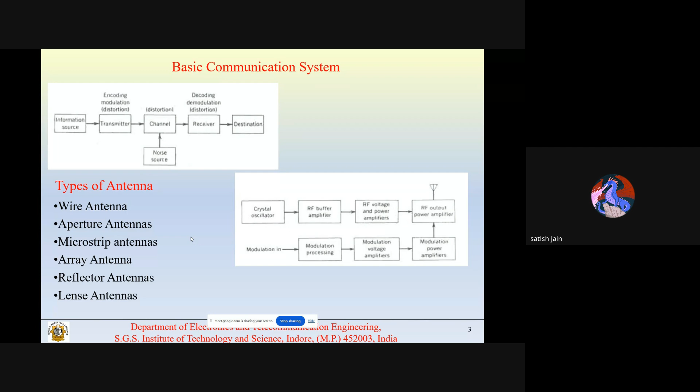So this is the role of the antenna basically. Antennas radiate the signal toward the receiver side. Now let us talk about the types of antennas. Types of antennas available are wire antennas, aperture antennas, microstrip patch antennas, array antennas, reflector antennas, and lens antennas.

it becomes the helix antenna. And remember, in the case of the dipole antenna, length and radius play an important role as far as performance is concerned. In the circular loop, the radius plays an important role. In helix antennas, the number of loops, the distance between the loops, the diameter of the loop, and the diameter of the helical tube are the parameters on which the performance of the helical antenna depends.

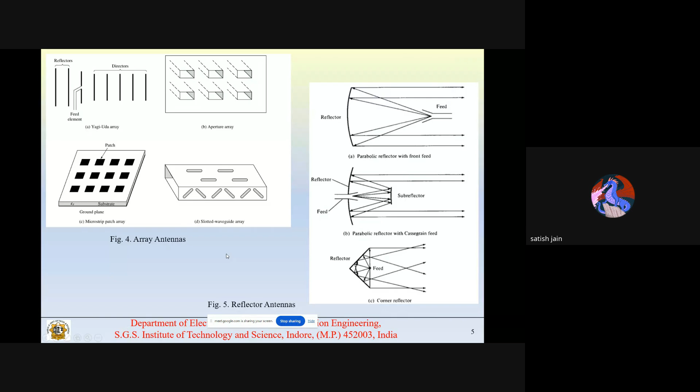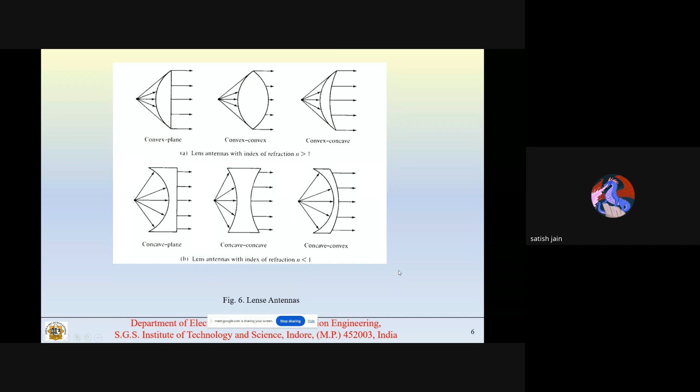Lens antenna. We have already studied lenses in physics in school. A lens works on light, and light is also an electromagnetic wave, so it can also be used to transmit the signal. There are convex-plane, convex-convex, convex-concave, concave-plane, concave-concave, and concave-convex lens antennas. These lenses have an index of refraction greater than 1, and these antennas, concave-plane, concave-concave, concave-convex, have a refractive index less than 1. Now, let us come to planar antenna technology.

Nowadays, researchers and designers are putting effort to design, develop and experimentally measure planar antennas. The microstrip patch antenna is one of the planar antennas. Just a few slides back, I showed different types of antennas, like reflector antennas and aperture antennas. One thing you might have observed is that they are three-dimensional antennas. They are not planar antennas.

They are three-dimensional antennas. They have certain weight, certain volume, and they are bulky also. So in certain applications, they may not be useful. For example, in a rocket you cannot put a reflector antenna, parabolic reflector, etc., because of a lot of problems, especially aerodynamics. So for that you require an antenna which can take the shape of the rocket surface, like a planar antenna.

If you take a planar antenna, you can easily paste it on the surface of the rocket, because when a rocket is launched, you need to track it, and for tracking you require an antenna. The antenna has to send the signal, right? So on the surface of the rocket you have to put the antenna on the metallic body. This is called conformal. So you have to use flexible planar antennas, and flexibility you can create by using a substrate with flexibility like foam, etc.

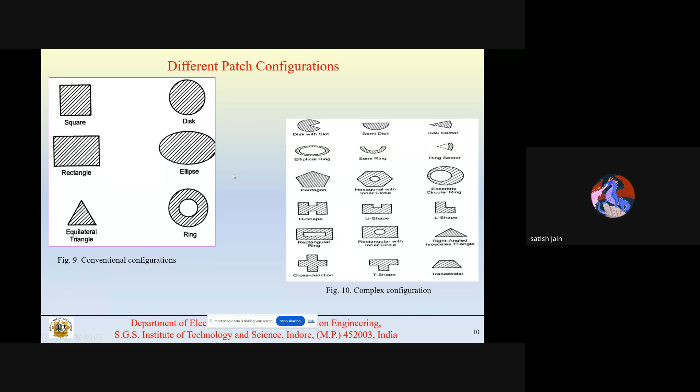is quite a difficult task, right? So that is very hectic, tedious and cumbersome. So complex configuration is to be discarded. So in general, most of the time, researchers and designers prefer the regular shapes because of the less number of variables involved.

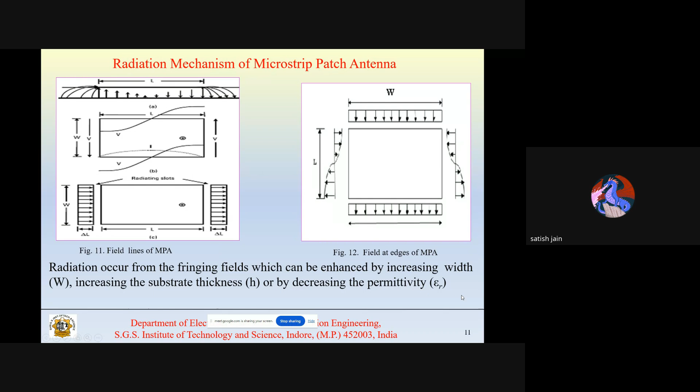Feeding techniques. There are a few feeding techniques available to excite the microstrip patch antenna. One is the coaxial feed. In coaxial feed, we have to drill from the downside in such a way that the drill reaches the patch. And when you connect the coaxial connector, the inside conductor is to be inserted in such a way that it reaches the patch, where it can be soldered. And the outer body of the connector can be connected to the ground plane, right?

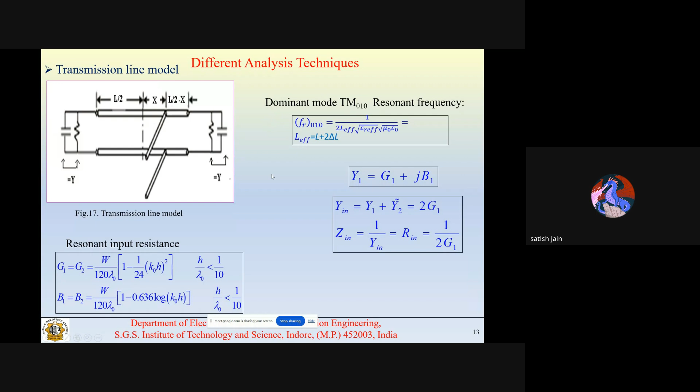The resonant frequency in this transmission line model is given by 1 upon 2 L effective times the square root of epsilon R effective, mu 0, epsilon 0. L effective is the effective length of the antenna, because there is a fringe field, so the length appears a little bit larger than the physical one. L is the physical length and the extension is delta L, so L effective is L plus 2 delta L. In this way you can find the resonant frequency using the transmission line model.

Now, in the cavity model, we consider the antenna as a cavity, because a cavity is nothing but some sort of confined area that's completely closed. A waveguide is open at both ends, but when we close it at both ends, if we short it, then it is completely closed, something like a box. Then it becomes a cavity. The same way we can think of our antenna; we can consider it a cavity.

It is available in the book. I've taken it from the Balanis book. It is a very, very standard book, easily available nowadays.

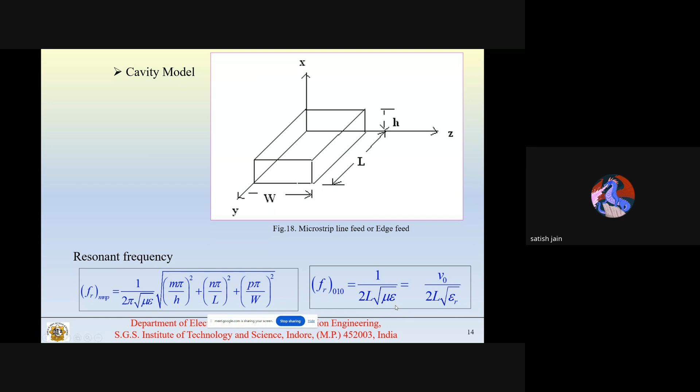So these are the resonant frequencies. If you simplify further for this particular mode 0,1,0, xy means y direction - field direction is the y direction in that case, and radiation is in the x direction. So for FR 0,1,0, the resonant frequency is 1 upon 2L mu epsilon under root, that is V0 upon 2L under root epsilon r.

Some important characteristics of the antennas are available, which I used to prefer in my design. Actually, when I design antennas, I ask my students to please focus on these points, because these points are very, very important. Of course, there are some more performance parameters available in the book, but from the experimental point of view, these are the parameters we go with, and their verification can easily be done experimentally.

So directivity is there, gain is there - I'm not going into definitions actually. These definitions are available in the book, and I think this whole microwave community understands them. So this is the directivity, this is the gain, resonant frequency and bandwidth, then dual frequency and multi-frequency behavior, then polarization diversity characteristics like linear polarization, circular polarization, elliptical polarization, right hand circular polarization, left hand circular polarization, then miniaturization, main lobe direction, axial ratio, half power beamwidth, efficiency, E and H plane radiation pattern in 2D and 3D, specific absorption rate, side lobe level, and front to back ratio. So these are the important parameters.

As far as bandwidth is concerned, for a linearly polarized antenna, percentage bandwidth can be calculated using the parameters H, W, L, lambda 0, where A is a constant having a certain value. Similarly, for a circularly polarized antenna, the bandwidth can be defined by AR minus 1, QT, A under root AR, where AR is the axial ratio and QT is the quality factor, which needs to be derived mathematically.

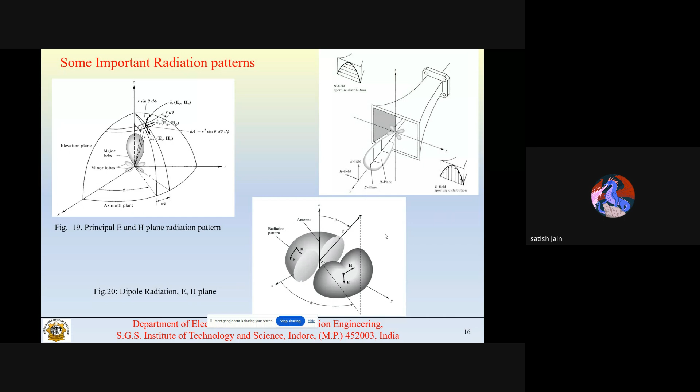So there is the H plane - if you see from the top you get a circle. If you see from the side, you get the definite figure-8 shape, which is the E plane. This is for the dipole antenna. To understand E plane and H plane, you must first understand the mechanism of the antenna - the approach is not the same for all antennas, it differs from antenna to antenna.

Now let us talk about bandwidth. The bandwidth of an antenna can be increased in many ways. You can keep a number of elements in the same plane so they couple with each other and increase the bandwidth. Another way, if you don't have space in the horizontal direction, is to stack a number of antennas one above the other - this is called a stacked patch antenna pattern, which also increases bandwidth.

This is the reflection coefficient plot, f2 minus f1. This is the absolute bandwidth, but f2 minus f1 divided by fr, the resonant frequency, multiplied by 200 percent, gives the bandwidth in percentage. So there are two bandwidths used in antenna design: bandwidth in percentage and absolute bandwidth.

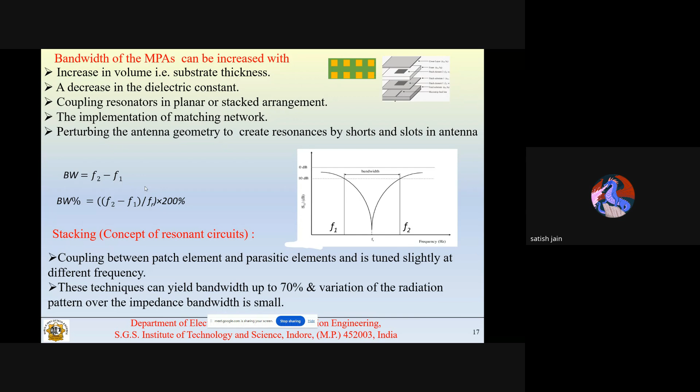Now let us come to the main topic, the main theme of this Atal FDP, that is the millimeter wave antennas.

We started from 6, so it's 45 minutes. Is my voice reaching everybody? Yes sir, yes sir, I am audible. If you want to correct me somewhere you can suggest it so I can rectify it. Yes sir, sure, I am running well. Yes sir, all well, okay. My point is clear to all of you I think. Yes sir. My flow could be a little different, but I expect all of you to grasp it - it is very, very important information.

So now I'm coming to the millimeter wave antennas. Nearly 36 slides are there in this presentation, so I think half time is over. A little bit more than half time, I will take 45 minutes, then I will complete it and pack up. Yes sir, no problem.

Okay, so millimeter wave antennas - I have shown a lot of slides so far. They are useful to understand the antenna and design concepts also. Once you understand them, it becomes easy to understand millimeter wave antenna design.

So let us not think in this manner - what is the use of E plane or H plane or bandwidth and this and that - because all fundamentals are useful. The beauty of antennas is every fundamental is useful, because you have to design the antenna, estimate the bandwidth, estimate the resonant frequency, see the polarization - whether it is linear or circular, and if circular, left hand or right hand circular polarization. You have to estimate the E plane or H plane radiation pattern, understand the gain, understand the directivity.

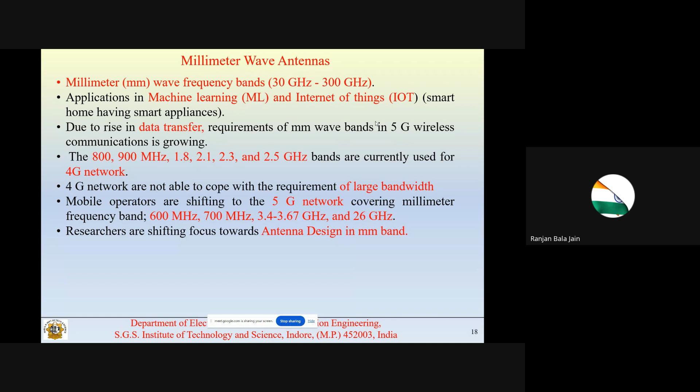Now there are applications. Sir, you are not audible. Hello sir. Hello sir, I think sir is disconnected. Okay, no problem, let me talk, let me call him. Yes sir is joining in some time. Yes madam. I'm sorry, 2-3 minutes, some issue happened. Yes sir. It's okay sir, no problem.

Now is the screen visible to ma'am? To all of you? Yes sir, yes sir, it is a millimeter wave antenna design. Yes, right sir, yes. So millimeter wave frequency band is 30 gigahertz to 300 gigahertz.

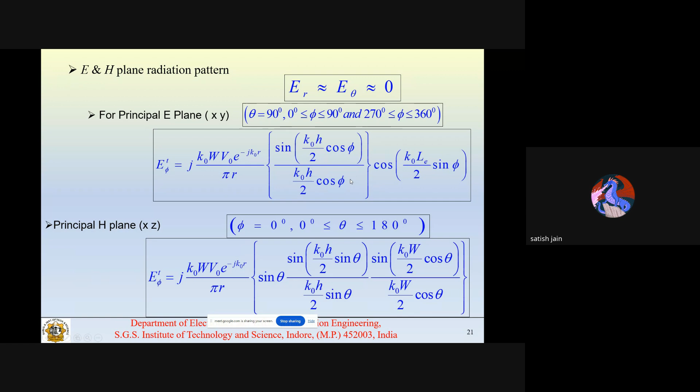Okay, the H radiation pattern cannot be parallel to the patch. You have to understand it, because this is not conceptually correct, right? Both planes are perpendicular to the plane of the patch, so that is the E plane and H plane, right? So these are the equations which can be utilized to calculate the E plane radiation pattern and H plane radiation pattern in the case of this rectangular microstrip patch antenna.

You can find out epsilon r effective. You have been given epsilon r because you are having a dielectric constant material, which has a certain height. You cannot change the height. Okay, so you have to lock it. You have to fix it. It is not a variable. Epsilon r is constant. So you have an epsilon r, you have a height h.

Now you require the width of the antenna. You don't know what could be the length and what could be the width. So you have to find out both. So first, you have the epsilon r value. And you are told, suppose, you have to design the antenna for 40 gigahertz.

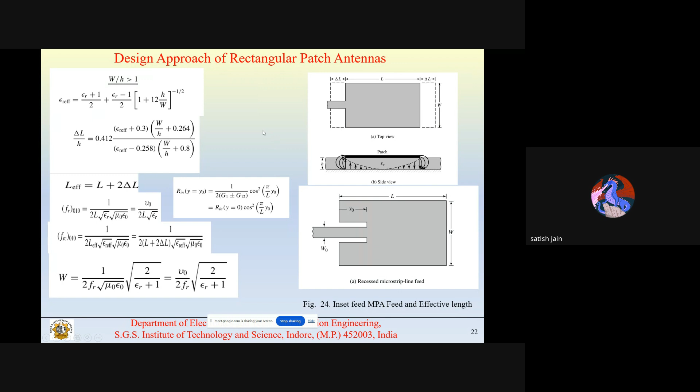As happens with the dipole, there is a certain relationship. v equals f lambda, right? So lambda is v upon f. Lambda is inversely proportional to f, right? And L is lambda by 2; the length of the dipole is lambda by 2. If you have a frequency, you can convert it into lambda and make it half, divide by 2, lambda by 2. That gives the length of the dipole.

Similarly here, if you want to find the radius, you can find it from the frequency. So design is easy because only one variable is involved here. In the rectangular patch antenna there are two variables, length and width. Of course, the feed location also has to be optimized in this case, right? Moreover, there is a fringe field at the edges, so through the periphery there will be a fringe field, right?

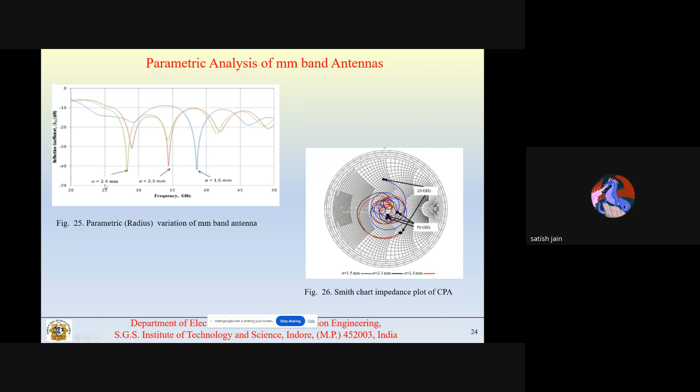Now the 5G antenna. What we have done is we have reached till 28 gigahertz, so a little bit shifted here. So what is to be done? Increase the radius of the patch a little from 2.4 mm onwards. So we are getting here. Now our radius of the patch is 2.71 mm, and this antenna is radiating at 26 gigahertz. That is one of the bands to be utilized in 5G applications. So this is the 26 gigahertz point.

And here the S11 value you are getting is minus 43.48 dB. This is a very appreciable amount. It shows that the reflection is very minimal. This is a very good design actually. This type of value is very rare as far as antenna design is concerned, right? And here the impedance behavior we have plotted from 20 to 50 gigahertz.

This pattern, the part which is minus 10 dB below, is within the VSWR 2 circle. So here this is the 20 gigahertz point, this is the 50 gigahertz point, and this is the 26 gigahertz point, exactly on the line and within the VSWR 2 circle, right? And the optimized parameters are listed here. The height of the dielectric is 1.6 mm, dielectric constant 4.4. These are constants, not variables.

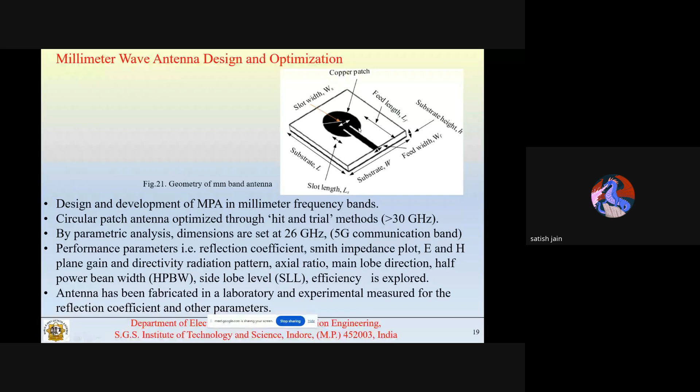Then length of the feed 2.81 mm. This is a variable, because our structure is this, right? So we have to optimize the radius, then the feed parameters, length and width, and the slot length and width. So 5 parameters we have to optimize. Length of the feed 2.81 mm, width of the feed 0.934 mm, slot length 0.52 mm, slot width 1.13 mm, then radius of the patch 2.71 mm. These 5 parameters are variable here, not only the radius.

Because we are not feeding it coaxially, we are feeding through the inset feed, right? And the height of the copper patch is constant, 0.07 mm. The dimension of the substrate we have not made variable; we fixed it at 12.5 mm by 15 mm. And the feed point location, this also we have optimized, 2.19 mm. So these are 6 parameters.

Okay, so these are the results of 5G antennas. You can see we are getting such nice results in simulation, of course. So far I am showing you the simulation activity. Once the simulation is over, we can go for experiments for validation purposes, right?

I will give you sufficient time for discussion, ma'am. Yes, sir. Possibly I may finish a little bit early, so you will get 10-15 minutes to discuss. That is the most important aspect. Yes, sir, E-plane and H-plane.

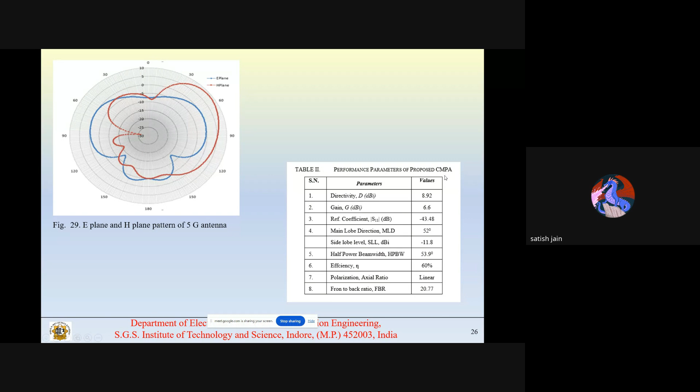And front to back ratio is 20.77, right? So E-plane and H-plane patterns for the 5G antenna, and these are the performance parameters of the proposed circular microstrip patch antenna. Clear? Now our fabrication starts from this point actually.

These are the machines where we have fabricated the antenna. This is a dielectric curing machine, microwave oven. Okay, because what happens, you have a dielectric sheet, then you have to clean it with water and other chemicals, and after cleaning you want to dry it, so you require the microwave oven, right?

Then you require a negative film maker, because the antenna pattern you have to develop on the dielectric sheets, so initially it has to be taken on the transparency, and from positive to negative you require a machine. So this is a negative film maker, right? Dry film developer. After the antenna has been printed on the dielectric sheet, you have to develop it. So you require the developer, right?

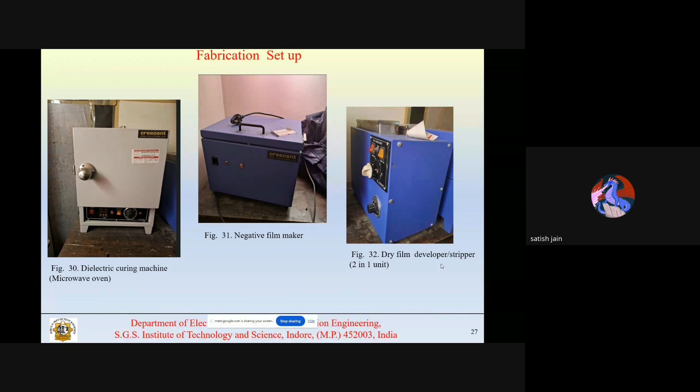Two-in-one unit developer stripper. Then this is the double-sided ultraviolet exposure unit with vacuum. Before developing, you need to expose it through ultraviolet, right? So there is a certain procedure actually, right? So this is the machine which you require.

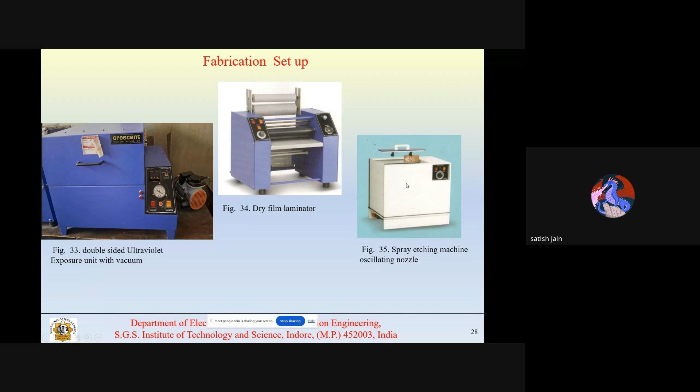Then dry film laminator, this is the lamination machine, because these are the films, and the dielectric sheet we have to insert in this machine, so the film comes on the dielectric sheet, and then you have to go for developing the film, right? Then after that you have to etch out material. After having the print of the antenna on the dielectric sheet, it requires etching out, right? So this is a spray etching machine, which we have.

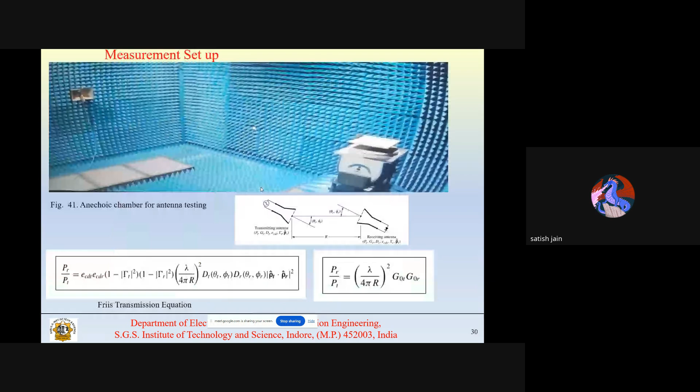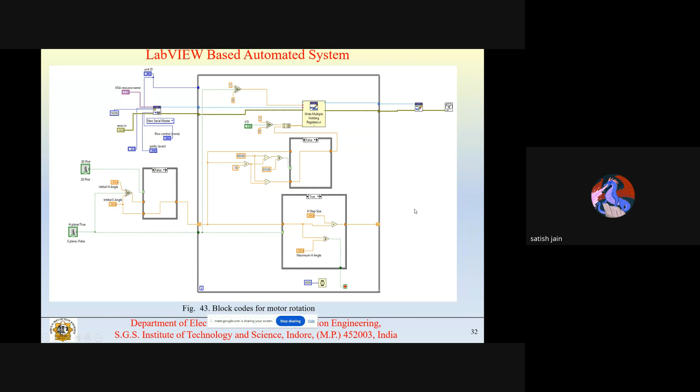So we developed this software at our own end, and after development, this company offered us jobs. The company has offered our students jobs. They are saying, send two students who know LabVIEW, right?

Chandramohan sir, can you please mute your mic? Hello, Chandramohan sir.

Yes, sir, you can continue. Okay, so

So here, in-house activity, I would like to tell all of you what we are going to do. We are running one chapter, that is ATMS, Antenna Test and Measurement Society chapter. We are Central India's chapter, running it in-house. Every month, on one Saturday, we conduct a lecture. Nearly 35 lectures are over, nearly 3 years are going to be over.

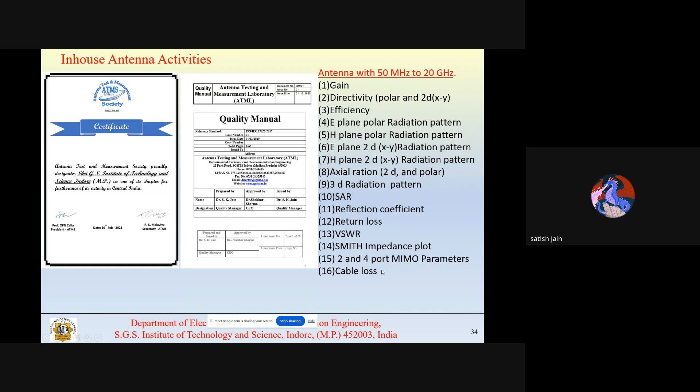These are the current activities. SAR measurement we have done just 2 days back. A particular person who had a project from MESE told us, sir, we want to measure the SAR. So we provided this facility. He wanted to measure the permittivity of the material, so we provided this setup, a coaxial waveguide setup. Through the VNA, we found the S11, S21, S22, S12, and by putting some equations and algorithms and developing some MATLAB codes, we found the dielectric constant of the phantom, which is nearly 50. Because he is using the phantom for SAR measurement, a very small antenna he kept below the phantom.

You can see here the VNA's other port cable is connected, which goes to the antenna downside, and on the antenna water has been kept, and on the water he has kept the phantom equivalent, that is the gelatin material, cubic structure you can say, equivalent to that. From the top we found different values of the electric field at different locations, and found the SAR value of this particular antenna.

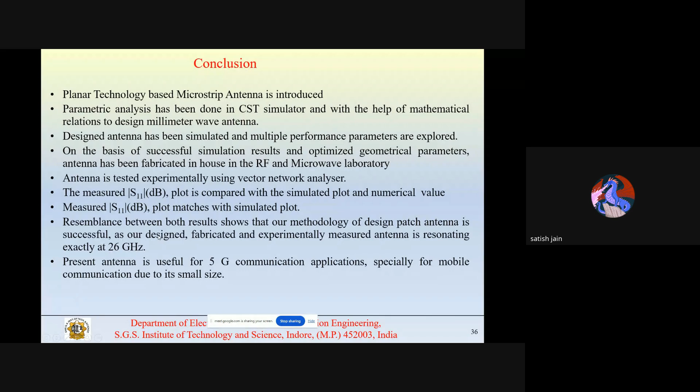So now conclusions. Planar technology we discussed, the parametric analysis we have done in CST, then the antenna has been designed and simulated. Then we have tested the antenna experimentally using a vector network analyzer. Many parameters we went through, like side lobe level, main lobe directions, efficiency, etc. Then we have proved and developed the antenna for 26 gigahertz, that is for 5G applications.

Okay, so these are the references.

And acknowledgement - I would like to acknowledge. I would like to thank the Ministry of Human Resources and Development. I would like to thank AICTE New Delhi, and I would also like to thank SGSITS Indore for providing TEQIP funded research facility to accomplish this proposed work. So thank you all, thank you so much.

Thank you, sir, for this insightful and excellent session with the realistic simulated values. Sir, there are a few questions from participants. Yes, definitely.

Suggest optimum feeding network method for broadband circularly polarized antenna arrays. Okay, so what is the problem in that? Optimum feeding network means what? Are you asking about Matlab, or a network analyzer? Arun sir is asking this question. Please clarify this question a little bit.

Actually sir, I want to design an antenna array which is broadband, starting from 10 gigahertz to 40 gigahertz. Specifically I want to use circularly polarized antenna, left hand and right hand circularly polarized antenna. So I want to know whether I can go for corporate feed or substrate integrated waveguide method, in order to avoid the losses and the phase errors.

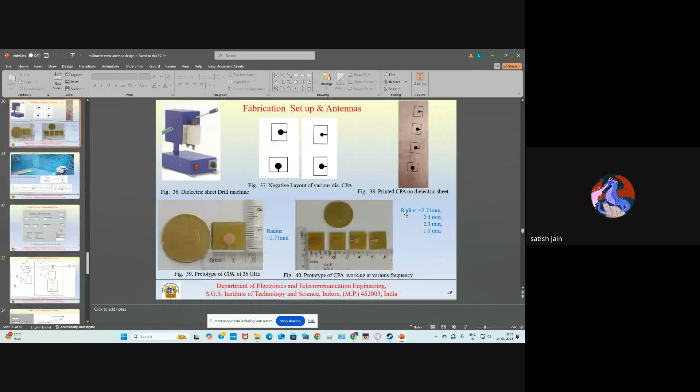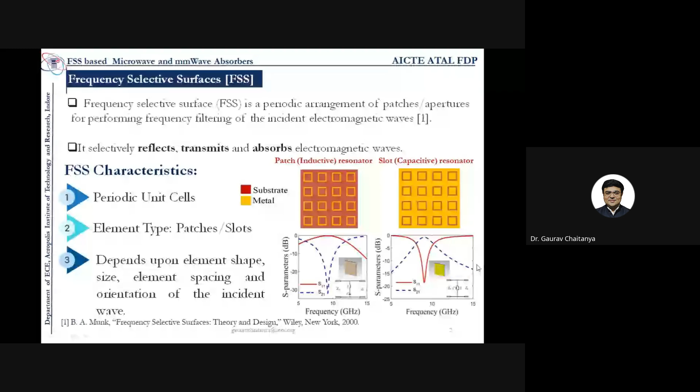If we see the applications of FSS, there are a wide variety of applications at present. They are well accepted in radomes, absorbers, antennas, polarizers, spatial filters, EMI shielding, dichroic subreflectors, and high impedance surfaces.

Out of these, if we talk about absorbers, in today's interconnected world where industries rely heavily on seamless communication, the management of electromagnetic waves is paramount. Across sectors such as telecommunications, aerospace, radar systems, and anechoic chambers, the demand for efficient electromagnetic wave control mechanisms has intensified.

At the heart of this demand lies the crucial role of microwave absorbers. Microwave absorbers find extensive industrial and practical application. In telecommunication, they are crucial for reducing interference and enhancing signal clarity in antenna systems and satellite communication.

In aerospace and defense, microwave absorbers play a pivotal role in stealth technology, aiding in reducing radar cross section of military assets and calibrating radar systems for accurate measurements.

In medical imaging, microwave absorbers improve image quality and reduce electromagnetic interference in techniques like MRI, magnetic resonance imaging. Additionally, they facilitate material testing processes, ensuring accurate measurement and analysis.

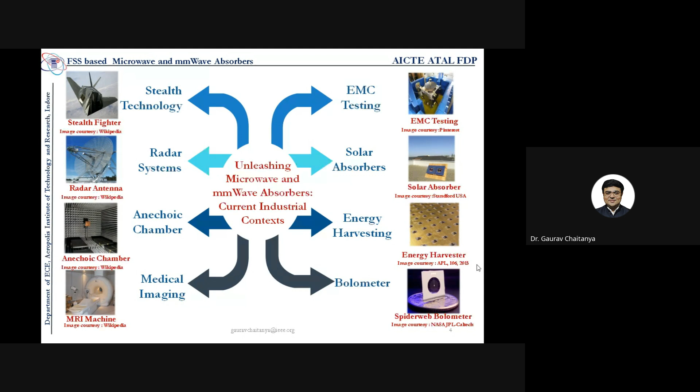Even in the automotive industry, for energy harvesting, microwave absorbers are employed to reduce interference and improve signal integrity in vehicle designs, contributing to the development of advanced driver assisted systems or autonomous vehicles.

If we see the physics behind how microwave or millimeter wave absorption takes place, generally a microwave or millimeter wave absorber exhibits absorption at microwave or millimeter wave frequencies, and can be designed as a single or multi-band absorber. How does this take place?

If some electromagnetic energy, EI, is impinging on the absorber surface, either it will transmit or reflect back. To get it to act as an absorber, we need to minimize the transmitted power as well as the reflected power simultaneously, which comes from this equation: absorptivity equals 1 minus S11 squared minus S21 squared. Now how can this be done?

One solution is applying a ground plane on the other side of the absorber. This complete metal lamination ensures zero transmission, so there will be no transmission, only reflection. The equation now reduces to A equals 1 minus S11 squared, as S21 is now equivalent to 0.

How do we get the reflection, or minimize the reflection, to be 0? Here we use the impedance matching criteria. We can design it such that the input impedance is matched exactly with the free space impedance using this particular formula. So microwave or millimeter wave absorbers finally use frequency selective surfaces as one of the major tools.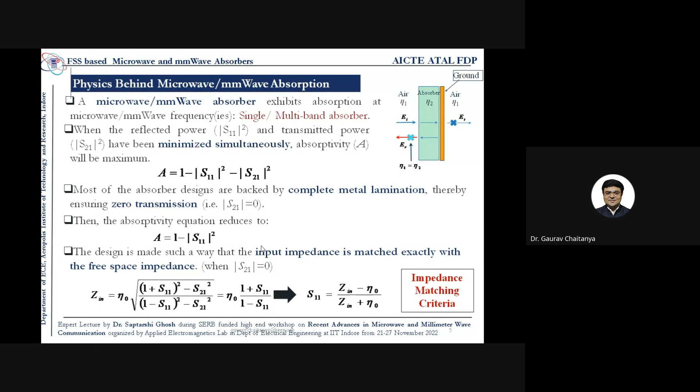If you go for the traditional absorber, there are certain challenges associated. If you talk about Salisbury screen, Jaumann layer, Dallenbach layer, or pyramidal absorber, or materialistic absorbers like ferrite, where people are using graphene or carbon nanotubes.

They do have certain challenges associated, like most of them are very expensive, bulky, cannot be transported, fragile, and very thick. So when real time applications come into picture, such things are certainly not much in demand. They are traditional, but there are better solutions nowadays in the market.

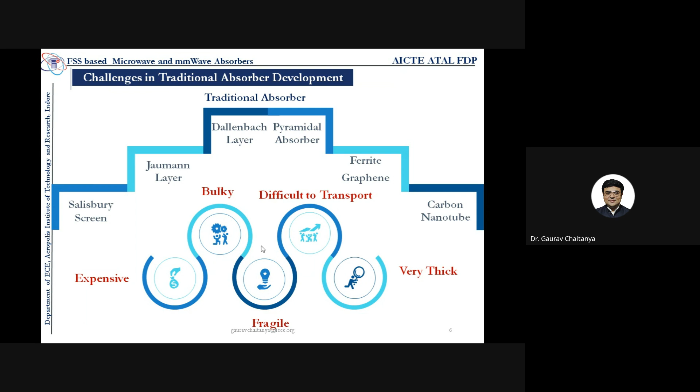The advancement over these traditional absorbers is the FSS based absorber designs, which come with benefits of reduced bulkiness. They have enhanced and strong absorption as compared to the previous traditional absorbers.

They have an ultra thin geometry of the order of almost lambda by 20 as the unit cell size. The design is scalable, where you can scale the design from a very low frequency to a very high frequency, so from microwave up to millimeter wave, and even to the visible range.

They have high angular stability and come with a cheaper cost. The popular fabrication method for such absorbers is the photolithography based PCB manufacturing process.

Let me make you understand the measurement technique, because recently Dr. S.K. Jain was there, and he introduced you to several good measurement techniques for measuring antennas. Here I am giving you the measurement techniques, how to analyze or finally find out the parameters for the absorbers. So this is the setup we are using for the absorber design measurement, where two antennas

are placed in near proximity of each other, and then the background noise has been recorded. Now we keep a metal plate in front of the antennas, and the transmitted power has been measured, which is S21 square. The metal plate can then be replaced by the fabricated sample with identical dimensions. We generally make a dimension of almost 250 cross 250 mm or 300 cross 300 mm,

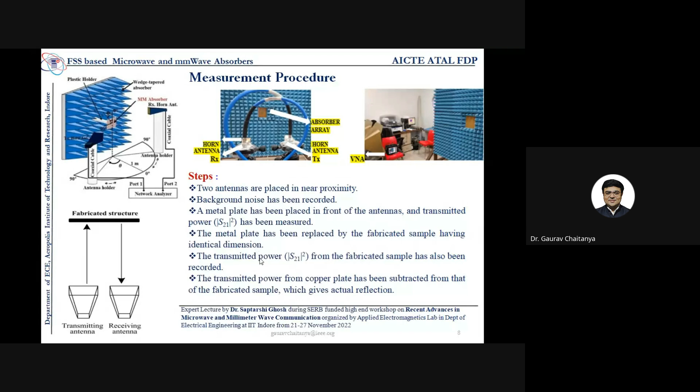Now if we go for the oblique incidence measurement, we have two types of measurement technique, where measurement is done on different polarization angles at normal incidence, and then for different oblique incidence angles. So if we send the wave normally, with a zero angle, keeping the transmitter and receiving antenna in close proximity, we can rotate the fabricated structure over several angles with some step sizes from 0 to 45 up to 90 degrees, and then see whether it is a 4-fold symmetry or a 6-fold symmetry structure.

Generally the structure gives you a polarization free or polarization insensitive response, and that is the requirement, because in real time applications we generally don't get all the incident waves impinging only from the normal. It generally comes with an angle. So such an arrangement and such calculations are necessary to calculate the response of the absorbers. Another particular thing is the oblique incidence under TE and TM measurement.

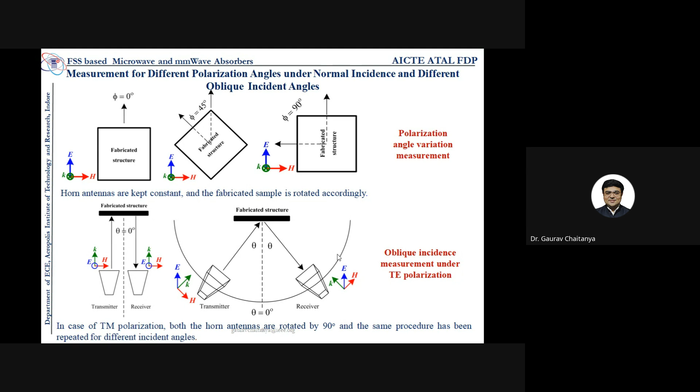What we can do is keep the sample at a fixed place, and then increase the angle between the transmitter and the receiver from 0 degree to 90 degree, and then see up to what degree under TE polarization or TM polarization we are getting a good response. We call that response the polarization insensitive behavior or the polarization stable behavior of the fabricated absorber.

The incident magnetic field aligns perpendicular to the plane of the split ring resonators, inducing magnetic excitation and resonance in the ring. However, this proposed absorber has a resonance at almost 2.0 gigahertz and a non-planar structure. Such arrangements are difficult to transport or to arrange in the same fashion at all angles.

Then comes a structure given by Landy. He gave the first metamaterial based absorber, realized with a structure size of almost lambda by 20 as compared to conventional absorbers. Of course, these absorbers are scalable from microwave to terahertz, terahertz to infrared, infrared to optical. And they can be easily fabricated, as I already told you, with PCB technology.

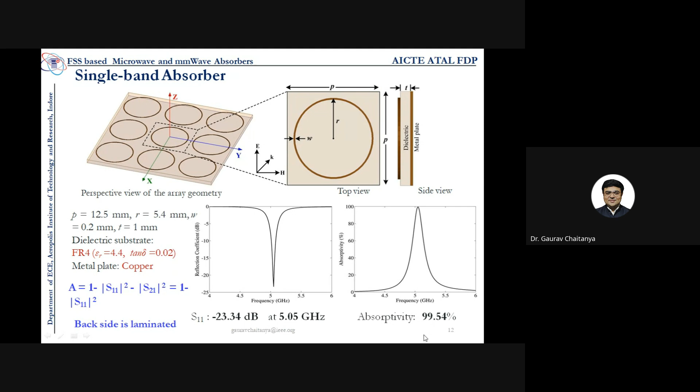Now the absorption takes place because of two things: the ohmic losses and the dielectric losses. The ohmic losses are generally because of the top copper ring. With lossy dielectric losses because of the dielectric material in between, it gives a very good reflection coefficient of almost minus 20 dB and a good absorption at almost 5.05 gigahertz.

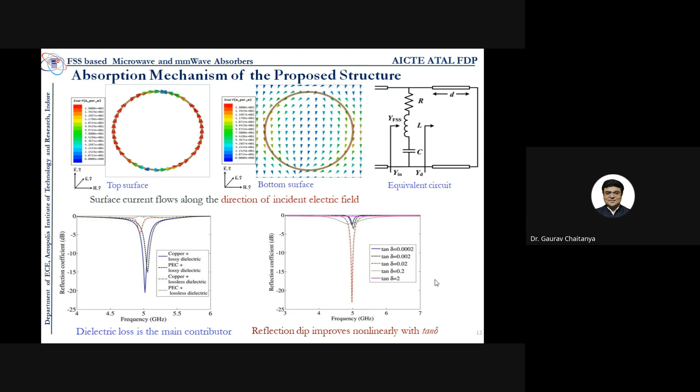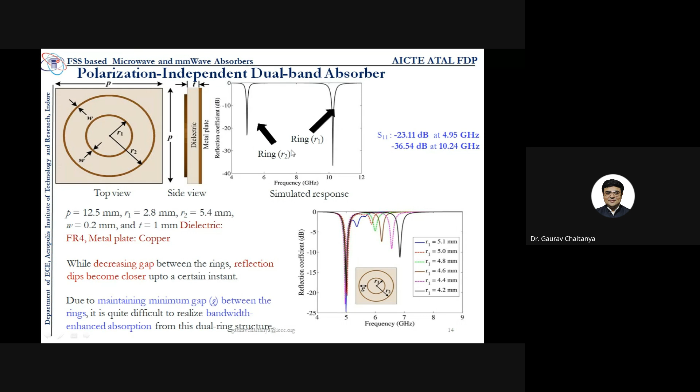Now from one ring, if we introduce two rings, what will happen? We'll get two resonances, obviously. We are getting a resonance of -23.11 dB at 4.95 gigahertz and -36.54 dB at 10.24 gigahertz. We are getting two resonances because of ring 1 and ring 2. The similar type of arrangement is going to be here.

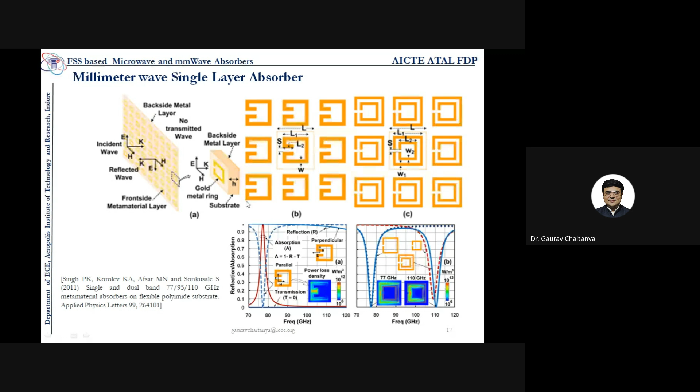At millimeter wave, we see a similar type of arrangement. Because of this split ring resonator structure, we get one resonance at 77 gigahertz, and because of this inner structure, we get another at 110 gigahertz as the resonant frequency. Such an arrangement has been done by PK Singh, where they use polyimide as the substrate and gold as the metal ring. So this has been shown here.

Then if we bring the resonances close enough, we can enhance the bandwidth. Because of this outer split ring resonator, we get one response, and with a meandering line arrangement inside, we get another response. Now we try to bring these responses close enough to each other that they contribute together in an enhanced response with a significant full width half maximum bandwidth.

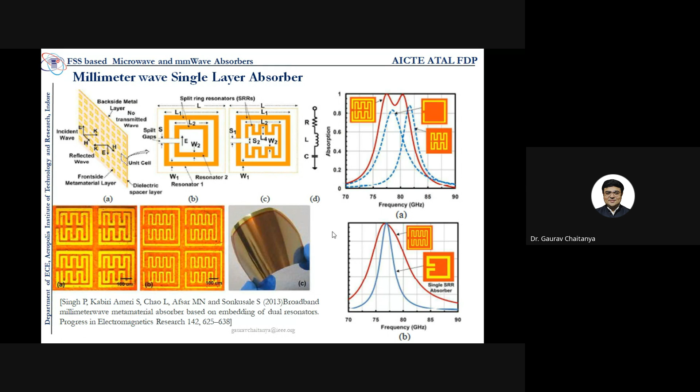And then we can see this is the fabricated part by PK Singh, and this wonderful flexible part can be very well bent with different radii of curvature. However, the complete assembly is very costly because we are using gold as the metallic part and polyimide as the substrate. But such arrangements are very well versed and regularly used in industry. Another way to get enhancement in the bandwidth is again bringing the resonators close enough.

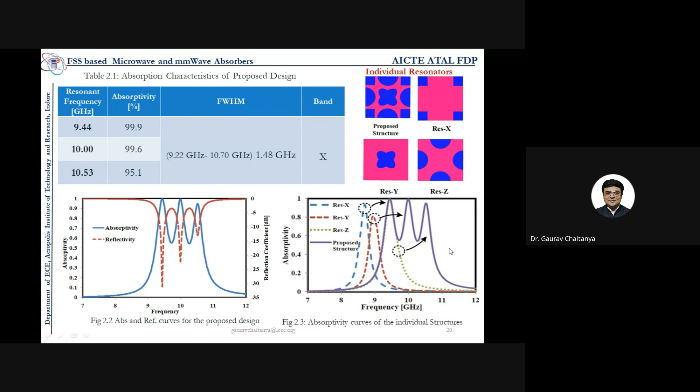There is another approach for the bandwidth enhanced FSS based absorber: a multi-layer approach. It features the model's accuracy, with numerical simulations aligning closely with analytical calculation for layer counts up to 40 in total, using a stacked metal and dielectric arrangement. Leveraging this model, the proposed method broadens the absorption bandwidth, either by increasing the layer count or by arranging the unit cells in close proximity.

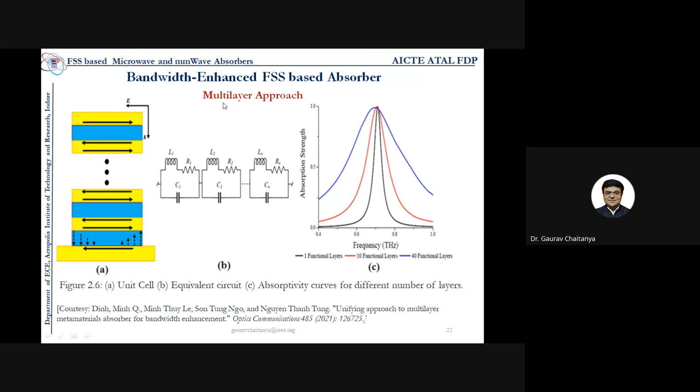Simulation affirms the efficacy of this approach, showcasing that a 40 layer configuration achieves near ideal absorption of almost 0.96, from 0.4 to 1 terahertz. For a count of 1 functional layer, we get this bandwidth. For 10 functional layers, the bandwidth increases further, and for 40 layers, it increases even further. So bandwidth enhancement can certainly be obtained from a multi-layer structure like this.

But you can see there are some grating lobes associated here, and these grating lobes are not very well handled. This problem has been solved by introducing this spiral type of arrangement at the first unit cell, which is followed by again a loop and the patch which is backed with a copper metal. So this is the fabricated part, which has been fabricated using the carbon black ink, and they are stacked together, and we are getting an ultra wideband response in the absorber.

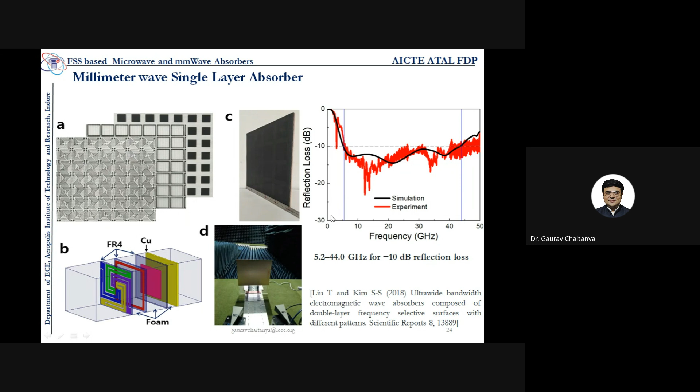So for bandwidth enhancement, there are certainly other types of circuit analog absorbers, which are generally realized and widely researched by the peers. So the dielectric thickness should be large enough to realize this type of resonances. The resistive as well as the conductive part is present here.

Hello, Vivek sir. Hello, Vivek sir. Can you please mute yourself? Okay. Yes, sir. You can continue.

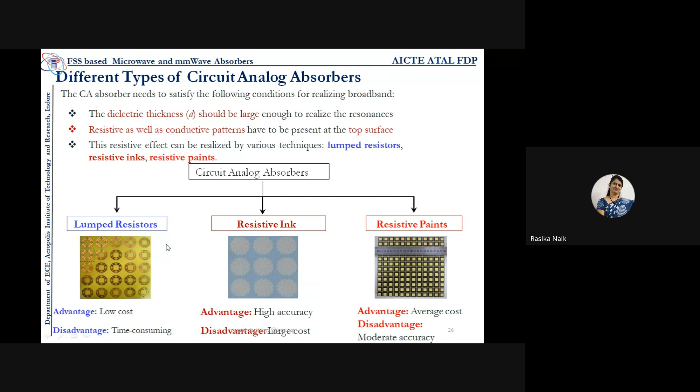Sorry. Yeah. So in this type of circuit analog absorbers, we can realize it using the lumped resistors, or the resistive ink, or the resistive paint. Such arrangements have generally been realized and studied by the peers in the last decade. If we are using the lumped resistors, they are certainly low cost, but putting the resistors in such a small geometry and ensuring that every resistor is very well soldered is a time consuming task. Another particular thing is a resistive ink method.

The accuracy increases, but the cost also increases a lot, because such an arrangement requires a micro machining facility for fabricating it. Certainly, it is there in IIT Bombay, IIT Kanpur, IIT Kharagpur, but it requires a heavy amount. So funded projects can go for this, but generally a researcher with no funds in hand could not use this resistive ink type of arrangement.

Then there is another arrangement where resistive paints are used, where the cost is average and the accuracy is moderate. We also used this type of resistive paint. This is a carbon black paint. Another type of resistive paint which is very popular is the silver paint. Almost a bottle of 100 grams comes at 9,000 or 8,000 rupees, and we come up with almost 3 to 4 prototypes with that, which is good for us for fabrication, and we are getting very good results out of it.

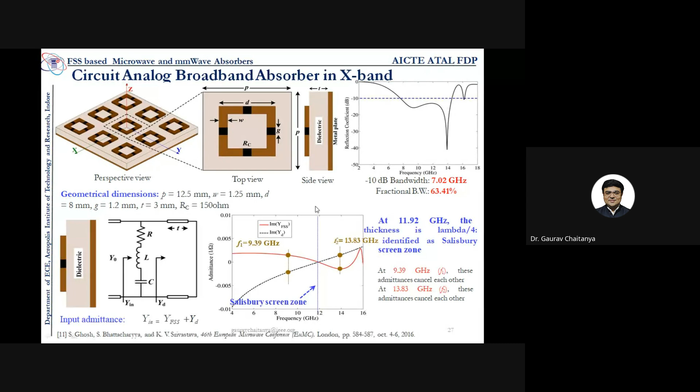So what we can see, we do have two types of admittance cancellation procedures here. One is this dip, which is almost 9.39 gigahertz, where we are getting a cancellation of admittance, and another is this dip, which is almost 13.83 gigahertz. We are again getting an admittance cancellation taking place, and because of this, we are getting a bandwidth enhanced response, which is not there if we are not using this type of lumped elements in between.

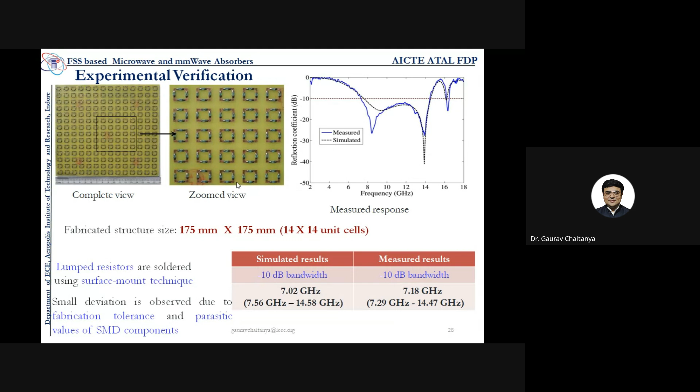So this is the experimental verification. Although the lumped components are surface mount here, a small deviation is observed in the fabrication. Generally, because of the parasitic values of SMD components and other fabrication tolerances, the values sometimes deviate. Otherwise, it is widely accepted, and people are using it for fabrication of bandwidth enhanced absorbers.

Another type of technique is using resistive sheet, as I mentioned. Here they are using films of ITO, which is indium tin oxide, with an air spacing on a PET type of sheet. The beauty of this type of arrangement is they are optically transparent. So not only are we getting a bandwidth enhanced response, but they are optically transparent as well. Even from a naked eye, it is very difficult to find out where our top patch is. The indium tin oxide is transparent, PET is transparent, and we are using air in between as a spacer.

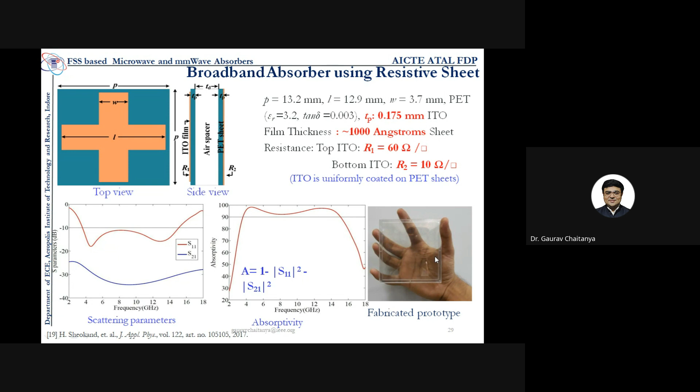So it is an optically transparent thing, which is very much useful for the canopies of aircrafts or the windows of helicopters. Such types of arrangements are there where we're using stealth technology, and we want a very good absorption response.

But the fabrication procedure requires a good amount of dedication and expertise before we go ahead. Just painting it with a brush doesn't work many times, because if this layer thickens, the resistive becomes a conductive type of arrangement, and the response is completely damaged. So we have to be very careful if we are using such a resistive paint arrangement. It can be used with a screen printing technique, so that becomes more prominent and tolerance free.

Another is the reconfigurable absorber. The arrangements that I have shown till now generally have a fixed frequency response. If we want to change the frequency, we need another absorber to be designed. Such an arrangement is very difficult in industry, defense or the military, where every time we face different frequency radars, we need to change the old arrangement. So it is better to use a reconfigurable absorber, heavily in demand nowadays.

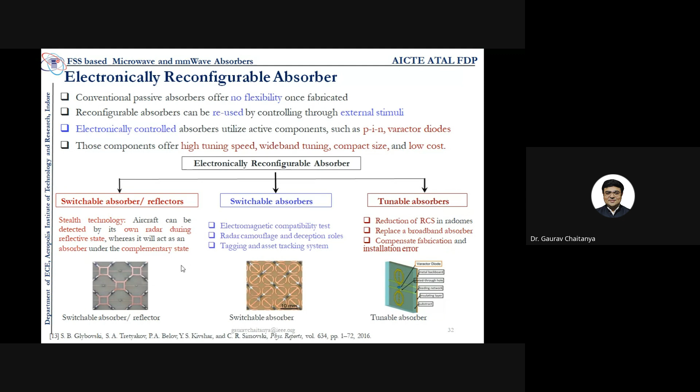If we see the surface current distribution given here, we can see there is an optimally very good current flowing through this central connect out here. This has been fabricated and we get a response. So we are calling this the on state.

Now, if we remove this central part where the connectivity has been removed, and put some electromagnetic wave impinging on it, we can see there is no particular energy flowing out, no electromagnetic wave or electric current flowing. So the off state generally gives a reflector type of behavior.

So we are getting a very good reflection coefficient of almost minus 25 to minus 27 dB, and at that time we are getting 0 dB, which is going to be a very good reflector in this case.

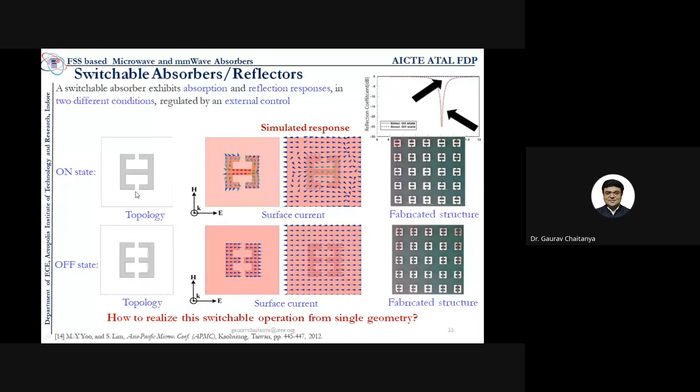Now, how to realize such type of arrangement in one structure? We can use here a pin diode as a switch. Generally a pin diode model has been used as a switch.

This is a pin diode model, where in the on state it generally takes on some resistive value of about 3 ohms, and in the off state we get a capacitance of 0.1 picofarad. So in the on stage the central connect works like a resistance, and in the off stage it works like a capacitance, and that's why the equivalent circuit changes, and the behavior also changes.

So in this single arrangement, we can realize both an absorber as well as a reflector. This is one type of arrangement that can be realized as a reconfiguration.

Another type is the switchable absorber. Here again we are using a pin diode, but now it is placed between 2 unit cells, not in between the patches, but between the unit cells. When we put it again, the behavior remains the same.

For the on state, or forward biasing, we can see it is going to be having an RL network. However, for the off state, it is going to be an LC network. Now, how is this taking place? For the on state, we get one particular frequency resonance at 4.1 gigahertz, and for the off state, we get a frequency resonance at 4.8 gigahertz.

So why is this happening? For the previous case, it was not happening this way—it was generally changing from absorber to reflector and back to absorber. But for this case, we see it shifting from one particular frequency and changing to another frequency, and not going back to a reflector this time.

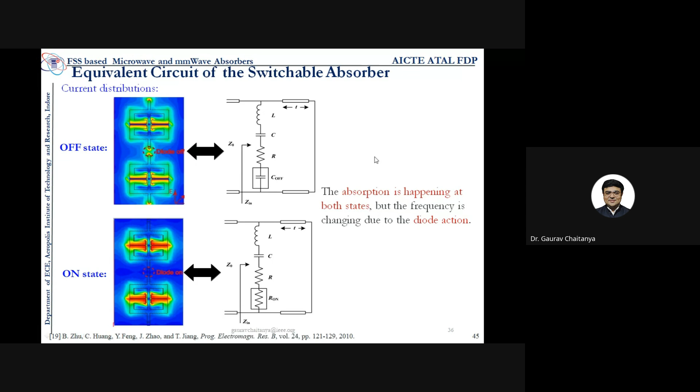Now, another thing is the tunable absorber, where we are not looking for one particular switching frequency, but continuous switching of frequencies from one to another, and that's why we use a varactor diode, not a PIN diode. A tunable absorber generally exhibits a variation in absorption frequency that can be continuously regulated by the external bias, and the structure has an infinite number of states.

Now there is not only an on state or an off state—you can get an infinite number of states, and you can regulate your varactor diode such that you get many stages, depending on the tunable junction capacitance, which is dependent on CJO, the zero bias junction capacitance. Then there's VJ, the junction potential, the grading coefficient M, and a packaging capacitance associated with it.

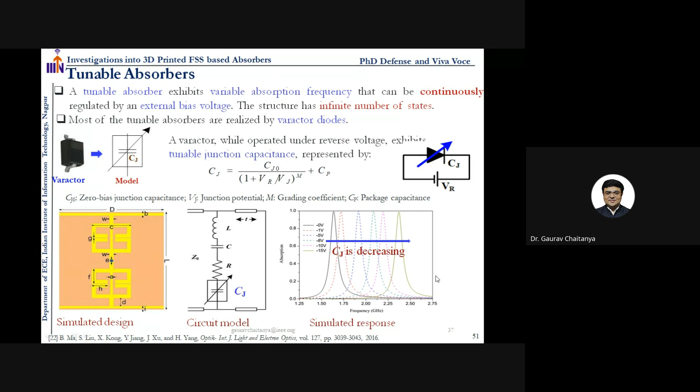The variable value here is just VR—nothing else changes, all other things remain constant. As CJ decreases, we see a blue shift in the frequency. The frequency increases from 1.25 to 2.75, as the bias increases from almost 0 volts to -1, -5, -8. So if we decrease CJ, we get a shift in the frequency, and this is how the tunable absorber could be realized. This is one type of reconfigurability we get with the electronic arrangement.

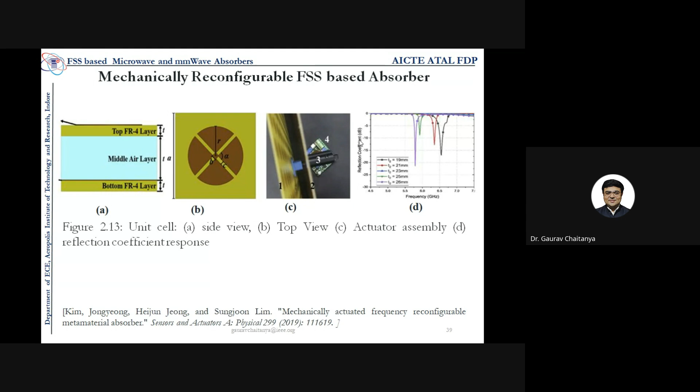Another important aspect nowadays is the miniaturization of absorbers. Miniaturization is very important in order to achieve low packaging, where we use arrangements such that absorption characteristics can be obtained, but the surface current should not be optimally large. So what we want is something that is electrically large, but whose physical size does not change. For that, we can use lumped elements like capacitors or vertical interconnects.

Another type of arrangement, which you are all well versed with, is fractal structures, where we use self-repetition to increase the electrical length within a small physical length, and thus try to decrease the frequency.

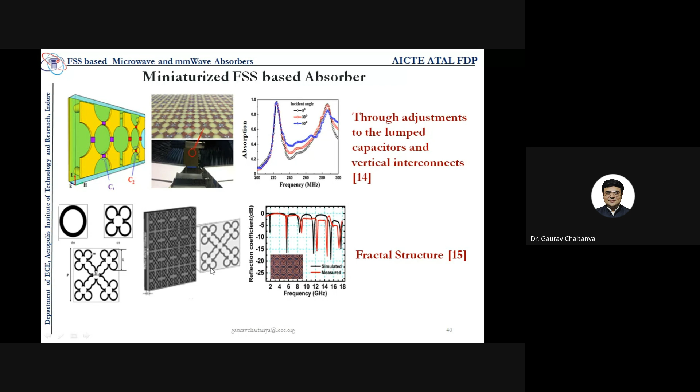Now, if we consider real world applications, most of them are not flat surfaces but curved in nature. If we consider torpedoes, fighter planes, or aircrafts, most of these have curved surfaces, not flat surfaces. Most of the research published in this domain deals with flat surfaces, so it's important to also analyze curved, conformal behavior.

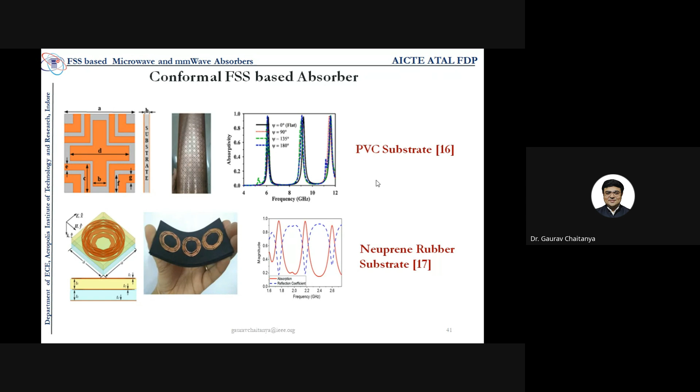Here there are two particular structures where a PVC substrate or a neoprene rubber substrate has been used, realized for conformal behavior at different radii of curvature. You can fold it to some particular degree, and the resonance behavior still remains the same. Here we see the radius of curvature changing from 0 to 90 to 135 to 180 degrees, and the resonance still remains the same, with no changes in resonance. This is important to analyze before going for real world applications of FSS based absorbers.

Now, most of what we have studied so far are PCB technology based absorbers. We use PCB technology, specifically the photolithography method, to realize the FSS based absorber. But there are certain limitations of PCB based technology.

One limitation is rigid and planar geometry. They are generally very rigid, and with a planar geometry we cannot change the flexibility or the conformality. So this is one limitation.

Another issue is material constraints. We need to depend on commercially available materials in the market, such as FR4 substrate, PET substrate, or Rogers. Some, like FR4 or PET, are somewhat cost effective, but Rogers or Arlon Duroid are very costly and difficult for us to arrange.

Also, these PCBs are not optimized for FSS needs. They are generally optimized for conventional circuitry, but we use them for making our antennas or FSS based absorbers, which is not what they were originally developed for. Additionally, if we go for photolithography based processes, it is time consuming for PCB fabrication, and there are always cost implications, since PCB fabrication is very costly.

As one participant, I could hear there was a question from a participant to Dr. SK Jain about whether particular fabrication facilities are available. There are certainly a number of fabrication facilities available. I took care of setting up an idea lab in our institute, a very good arrangement given jointly with AICTE, costing almost 1 crore rupees, and we have developed all such facilities in-house.

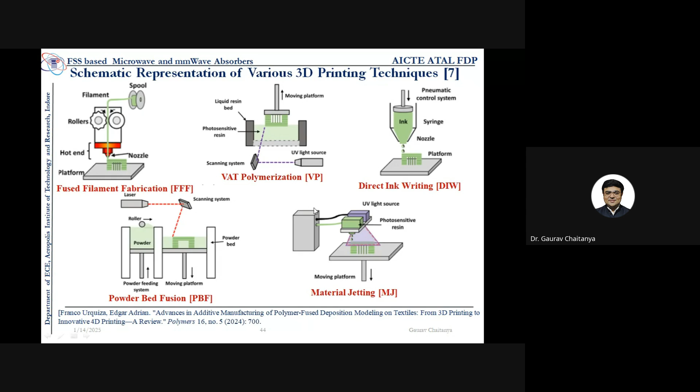So they are certainly very famous types of 3D printing techniques. And out of these five, if we compare, the most popular or the most suitable low-cost technique is the fused filament type of technique that we are using, which has a low to moderate cost with a resolution of almost 100 microns.

Many customized material options are available here. Metallic printing is also available. Multi-material printing is also available, where you can use not only one type of filament, we can use 2 filaments, 3 filaments, or 2 different materials in one particular thing. So people are even doing research where they are making layers of one dielectric on another dielectric, to a third dielectric, and then finding out their impact on the design of the absorbers.

Then there is no need of post processing in the fused filament method. The thermal stability is also good, and the speed is moderate. If we compare, all the others are certainly very costly compared to the fused filament technique. And other than that, there are very few customized material options available in the others. So this is the most popular one.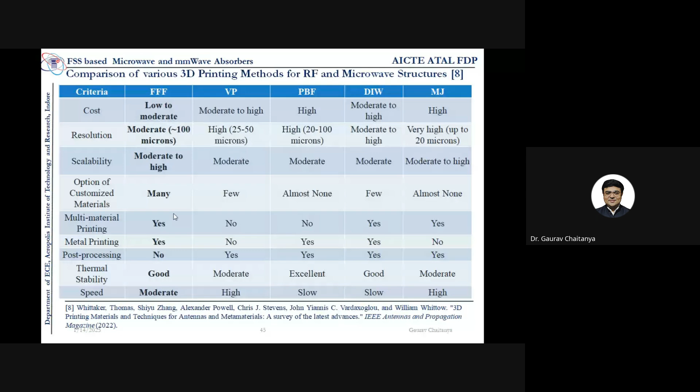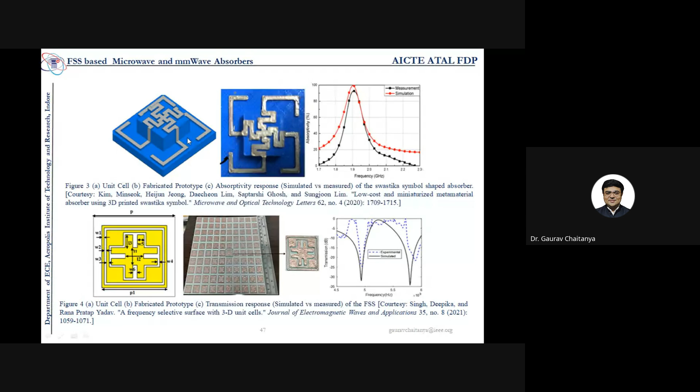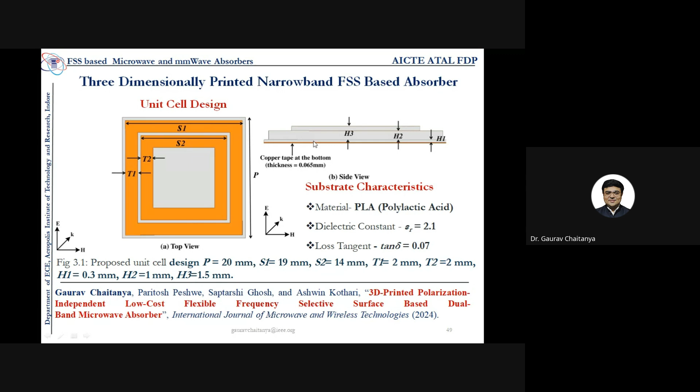So these are some of my prototypes. What we can see here is I've used a very simple type of arrangement. We have used two square loops here, but at two different heights. So this particular loop, S1, is at one particular height, and another loop is at another particular height. Because of these two heights, of course, we are getting a narrowband response because of these shapes, with one response at 3.32 gigahertz and another at 5.46 gigahertz.

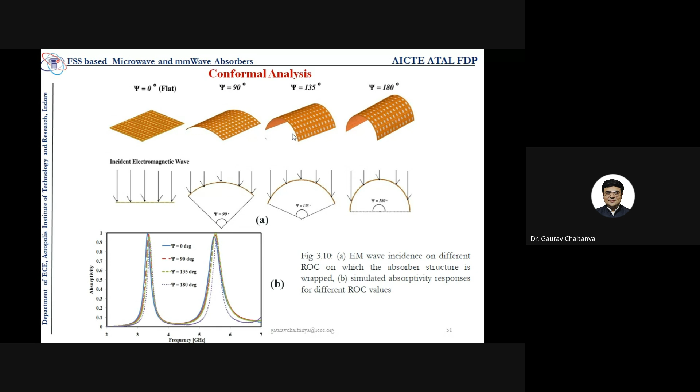If we compare it with previously published papers, for any bending material to be used, generally the thickness has to be reduced to less than 0.3 mm for the PCB. But here the total thickness is even more than 1.5 mm, and still we are getting bending. That is only because of the perforation within the 3D printed thing, and we are getting a very good response out of it. So this is the fabricated prototype, tested here at IIT Indore, and we are getting very good responses as compared to the 0-degree responses.

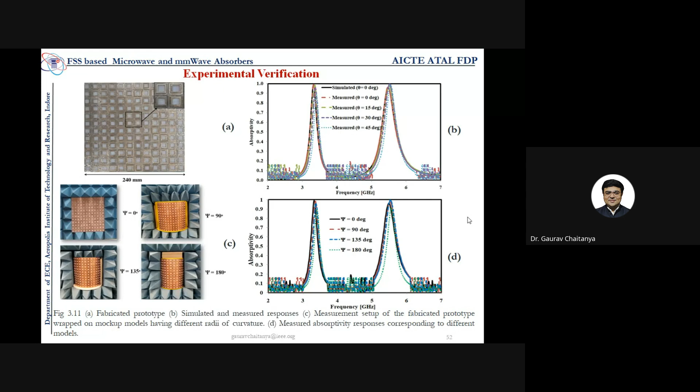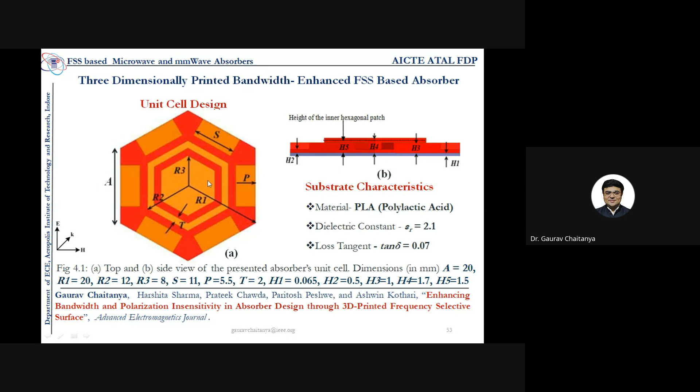Another degree of freedom that we have introduced here is a 6-fold geometry rather than the 4-fold geometry. Now, what is the use of a 6-fold geometry? Generally we use a 4-fold geometry where the unit cell is similar at all 4 folds. But with a 6-fold geometry, we use this hexagonal unit cell, where there are 6 combinations of master slave boundary conditions, and this increases the polarization insensitivity, which is significantly less in a square shape.

So if a square shape gives 30 or 45 degrees of polarization insensitivity, this can be increased to 60 or 70 degrees using such a hexagonal arrangement in FSS based absorbers. This has been fabricated, and we are getting a very good response, and the bandwidth has been enhanced by bringing the resonances close enough that we get a broadband response compared to other absorbers.

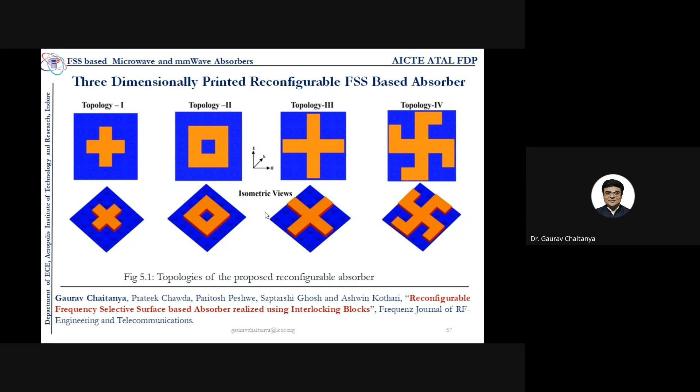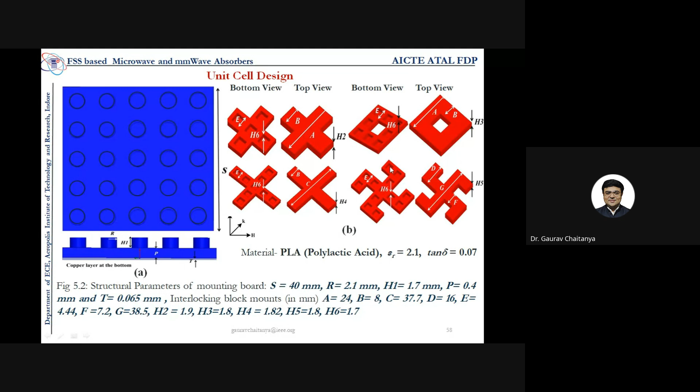Now another thing I'm using here is a Lego based concept. This concept came to me from my 7 year old kid. When he was playing with Lego, I found it can be a very good substitute for mechanical reconfigurability, just changing the top mount and keeping the base substrate the same. So this is the type of arrangement used. There are some studs elevated on the base. This is the base ground, and on it we have four different resonating tops, and on the tops we have some copper tapes.

So this is the full arrangement. There is a copper tape at the bottom, then a base board, then a top mount which can be replaced from this to this. Changing the top mount changes the equivalent circuit, and certainly the frequencies. So we get the frequency changed just by changing the top mounts, which is a very good reconfigurable technique without introducing complexity like active materials, lumped elements, or a very complex mechanical technique.

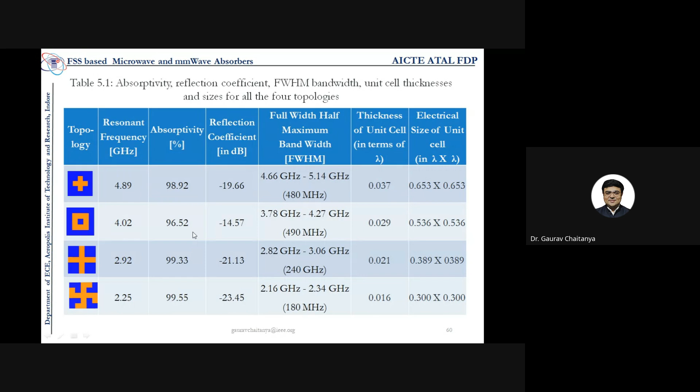Just by changing one particular top mount, we will change the frequency from one to another. So we can see that the absorptivity for the first case is going to be 98.92. For the second one, it is going to be 96.5, then 99.33 and 99.5, which is significantly good as compared to any other type of absorber. So this has been realized, and then we have calculated it.

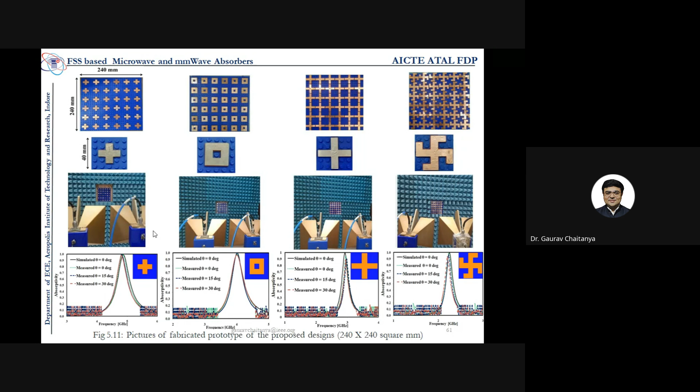So what we can see is that for the measured part, we are getting almost up to 30 degrees. We are getting a very good response with the polarization angles for such type of arrangements. Now this particular Lego type of arrangement is coming with a promising technology. There is another particular thing that we have done with it.

So there is a potential to introduce one more thing. What we have done is we are changing the height of the top mounts and now changing the frequencies. Not just changing the top mounts, but changing the heights of the top mounts and then changing the frequency. The shape is remaining the same. So from stage 1 to stage 3, we are changing the heights.

We have introduced this with three structures: the small cruciform, the large cruciform, and a swastik shape. We are getting very good miniaturization. From stage 1 to stage 3, the miniaturization achieved is 53%. For the second, we are getting almost 36%, and for the third structure, 20.4%. So a significant reduction in size has been introduced.

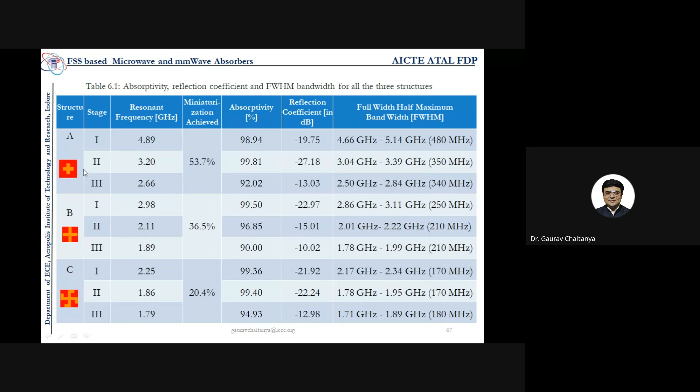The resonant frequency changes significantly from 4.89 to 2.66 just by changing the height of the top mount. So this is one more thing that we have introduced. This is how 3D printing brings a lot of advantages to FSS fabrication, and there are very good designs already available. People are doing a lot of work with curvatures and conformability nowadays using 3D printing techniques.